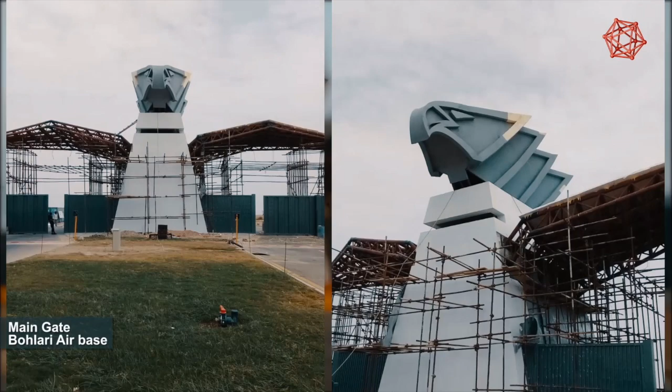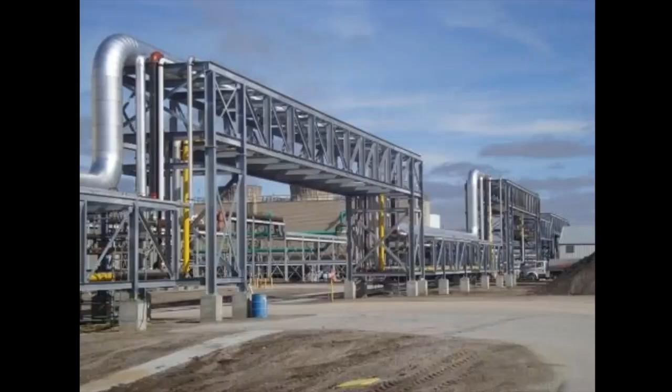This project explores the application of AI in the field of structural engineering. Structural engineering is a subject applicable in a variety of engineering fields, like the construction industry, mechanical engineering, aeronautical engineering, and the oil and gas sector.

The application of AI can reduce the time consumed in day-to-day structural designing with reduced effort. Furthermore, presumably the accuracy of AI predictions will be very high, as the relationship between the input variables and the output variables is mostly linear in nature. Through this project, the accuracy will also be explored. The application of AI in the field of structural engineering is vast but yet remains unexplored.

The application of AI can reduce the time consumed in day-to-day structural calculations, as the relationship between the input variables and the output variable is mostly linear in nature. However, the input variables are changing every time a new structure is designed. This is a time-consuming aspect of structural engineering. This can be phenomenally reduced if AI can intervene and suggest structural sizes at an initial estimation level.

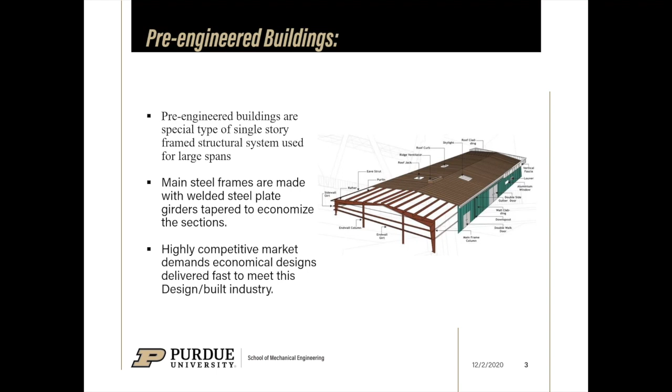AI for a single element will be a simpler task, but then it is also a simple task using a computer program. The true benefit of AI in structural engineering would be exhibited when we can find the preliminary size of a structural member working together in a structural system. One such structural system which is explored in this project is the pre-engineered building system.

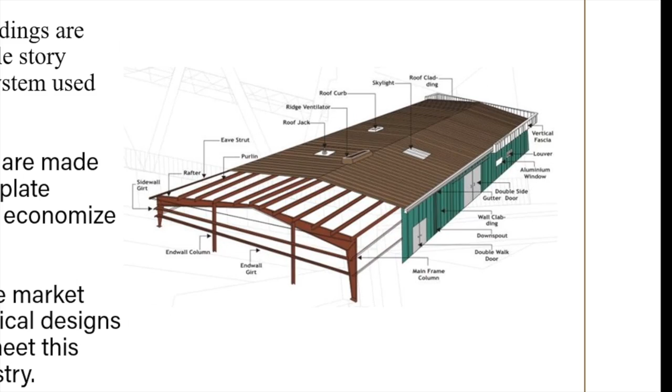Pre-engineered building systems are composed of tapered I sections, where the main frame is the main force resisting system, and the design of this main frame is the most time consuming and critical part of designing the entire building system. Pre-engineered buildings are a special type of single-story frame structural system used for large spans. These building systems are used for various types of structures like industrial buildings, warehouses, commercial complexes, showrooms, aircraft hangars,

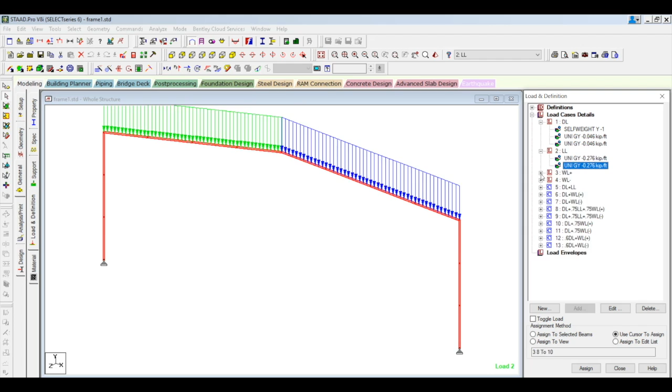factories and gymnasiums. Most PEB building systems are supplied by manufacturers on a design-build basis, meaning that the manufacturer designs and supplies this building. This can be a tedious task if one has to design buildings for potential clients on a daily basis for price estimates. Structural design of a building implies finding an optimal structural design that shall achieve a balance between the following requirements: strength, serviceability, and economy. This is known as optimal design.

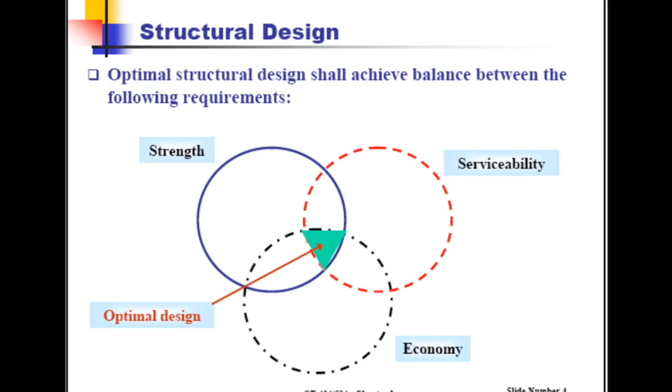AI can be used to predict member sizes very quickly, hence building weights and cost estimates rapidly. This will be a very effective practical solution, solving a real problem where the design and cost estimates can be prepared within minutes. In this project, a machine learning algorithm is produced using polynomial regression for prediction. An 80% dataset is used for training and 20% dataset is used for testing. After the completion of the project, it was realized that an R2 score of 86 was achieved.

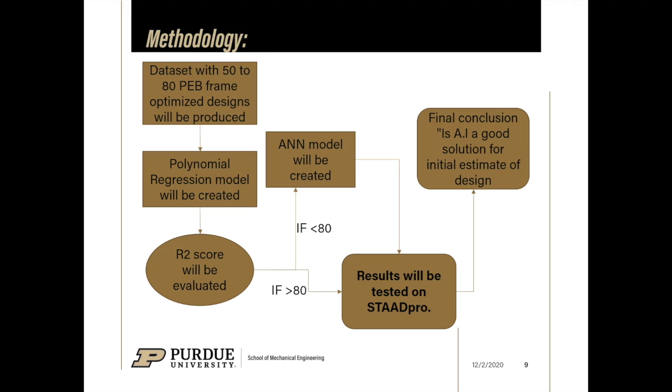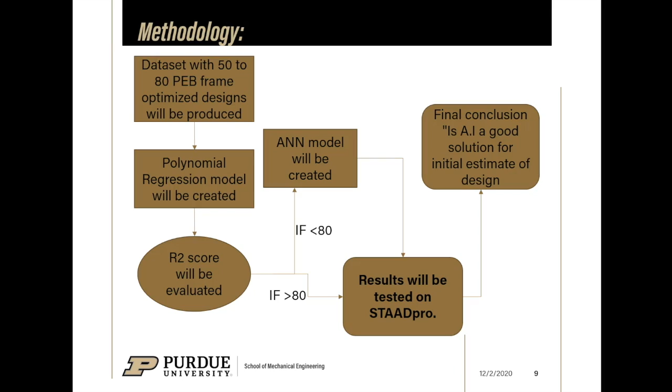A dataset of 50 to 80 pre-engineered buildings with optimized design was produced. This was utilized in a polynomial regression model that produced our AI model. The results deduced by our AI were then compared in STAAD.Pro to see and realize the efficiency of our AI model. The dataset eventually had 76 various PEB frame designs.

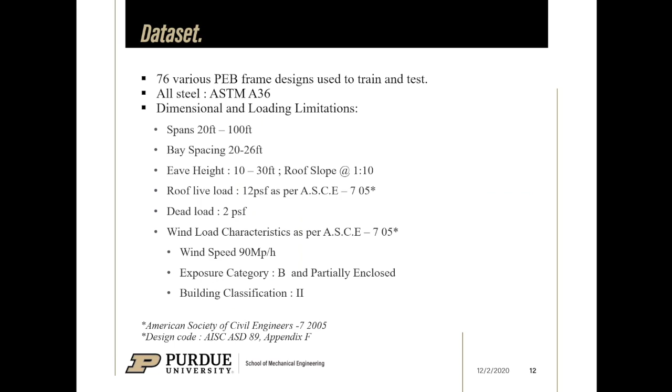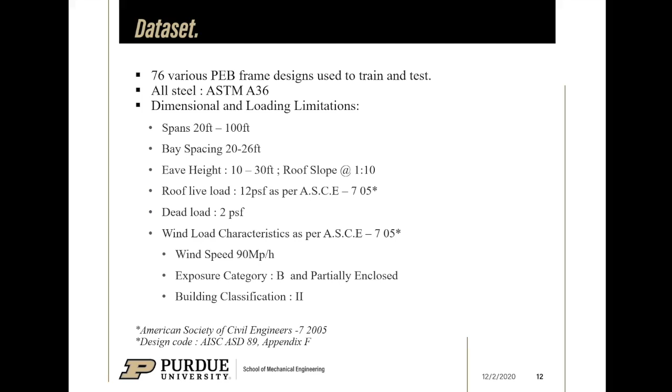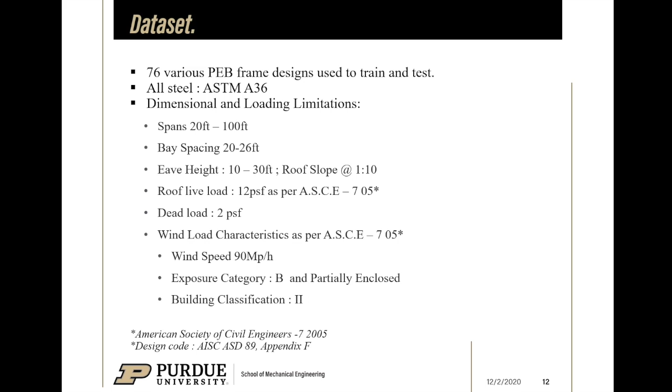Certain parameters were fixed for this small project. All steel was ASTM A36. The dimensional capacity for this algorithm was 20 feet to 100 feet span. Bay spacing was 20 to 26 feet. Eave height 10 to 30 feet with a roof slope of 1:10. Roof live load 12 PSF as per the American Society of Civil Engineers. Dead load 2 PSF and wind load was 90 miles per hour. And wind load characteristics as per ASCE 7 were for 90 miles per hour, exposure category B, and building classification II.

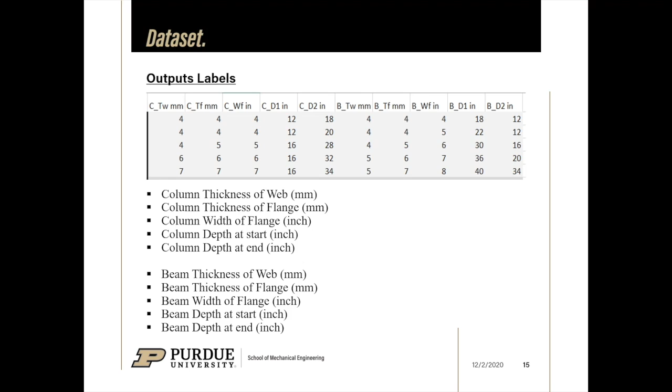The AI gave us certain estimates for our test cases. Two test cases are being presented in this presentation. The dimensions given by the AI model were then tested in STAAD.Pro FEA software. It was realized that the output given by our machine learning model was excellent.

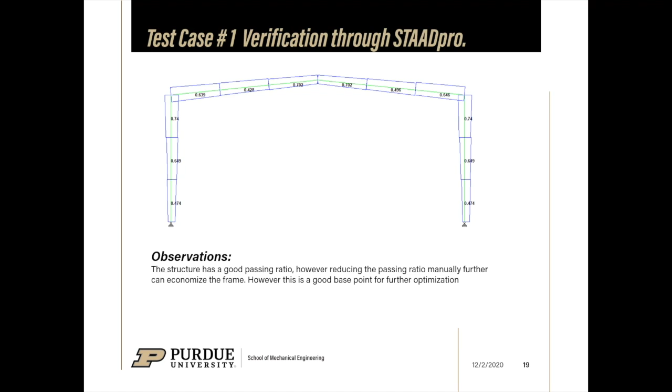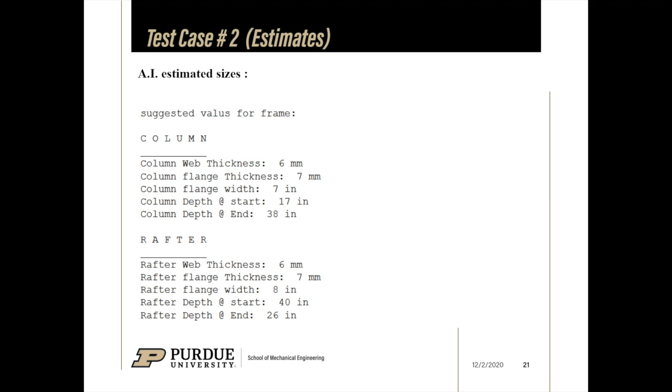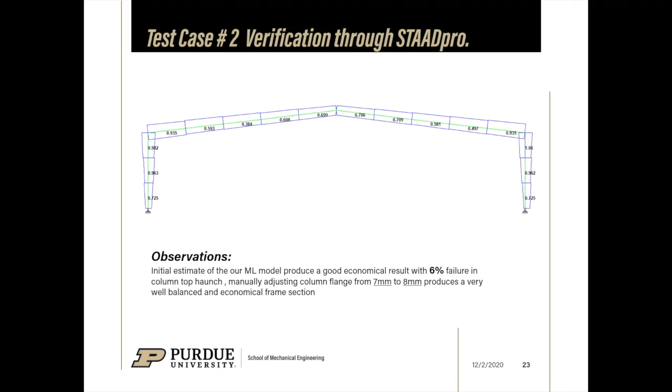Through this project, it was concluded that a simple machine learning code has produced excellent results by estimating PEB frame sizes within seconds. This hence shows that the application of AI in structural engineering has a huge potential. As far as initial sizing of structural members is concerned, even a simple polynomial regression model has proven to be very efficient. However, a sound dataset for machine learning models is important. The future seems very bright for artificial intelligence in structural engineering.